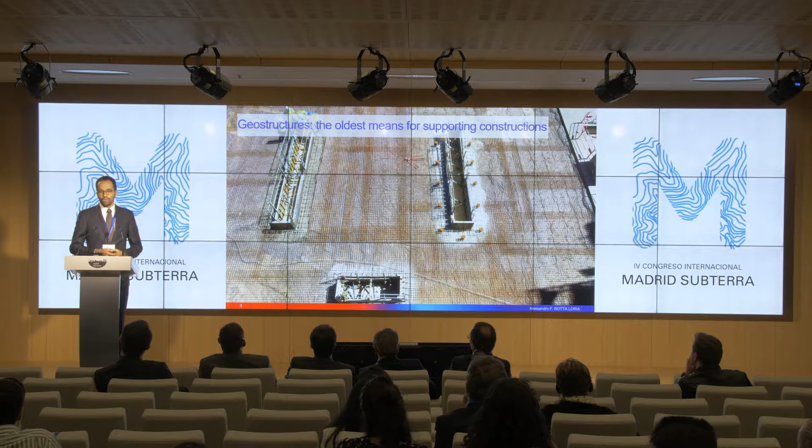Then, as for sure you know, geostructures actually represent probably, again, the oldest means that has been used for sustaining structures. So energy geostructures basically resort to the two previous principles. Actually, energy geostructures leverage the two previous principles by equipping pipes, typically made of polyethylene, within reinforced concrete structures containing a heat-carrier fluid that circulates into them.

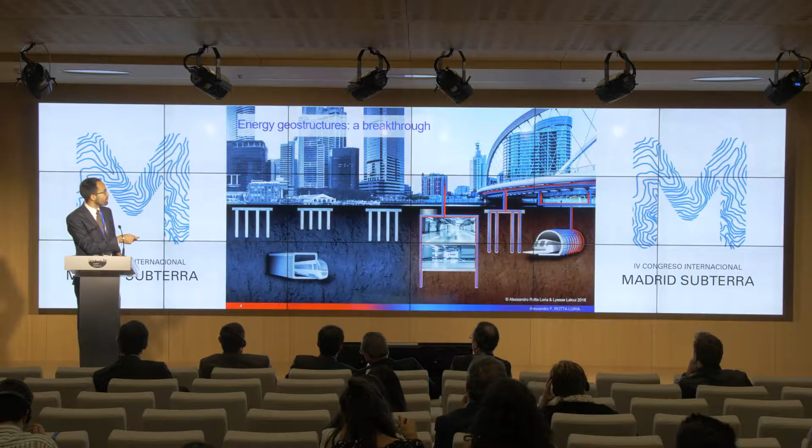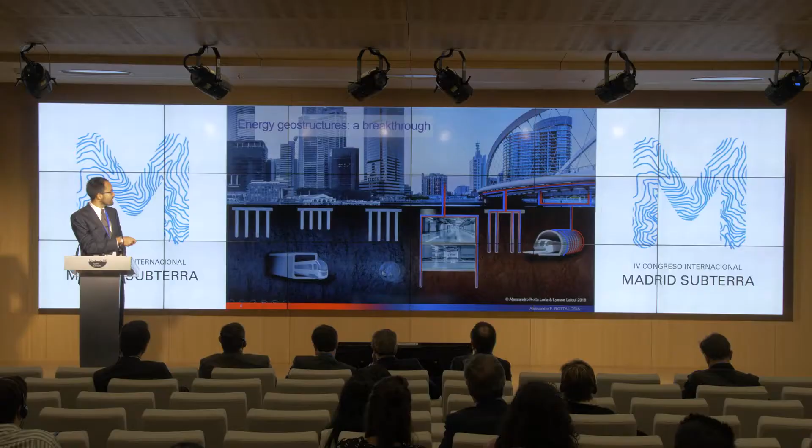And this actually allows to achieve a favorable heat exchange between the ground and all types of built environments, so that conventional structures such as pile foundations, retaining walls, and tunnels can be transformed into so-called energy piles, energy walls, and energy tunnels. So that's the novelty. And again, the concept is relatively simple. It's based on the fact that the temperature at shallow depths remains relatively constant throughout the year. And so what we are actually doing with these energy geostructures is to harvest the energy that is present at shallow depths for applications that include, for example, the heating and cooling of buildings and infrastructures.

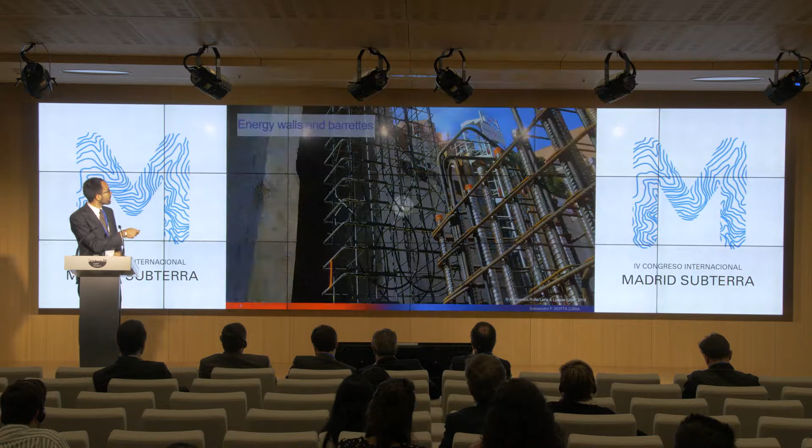So what we get in practice are these kind of structures in which you can see pipes that are mounted along the reinforcing cage of piles to transform them into so-called energy piles. Or you can deal with so-called energy barrettes and walls. And again, there you can appreciate the pipes installed along the reinforcing cage of these structures, in which the heat carrier fluid will circulate, exchanging heat. And this heat carrier fluid typically is water. So again, the principle is simple, and as all simple principles, it works, the technology works pretty well.

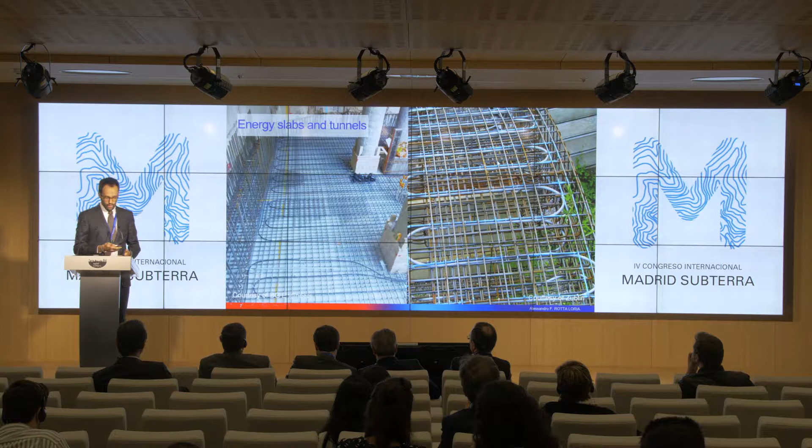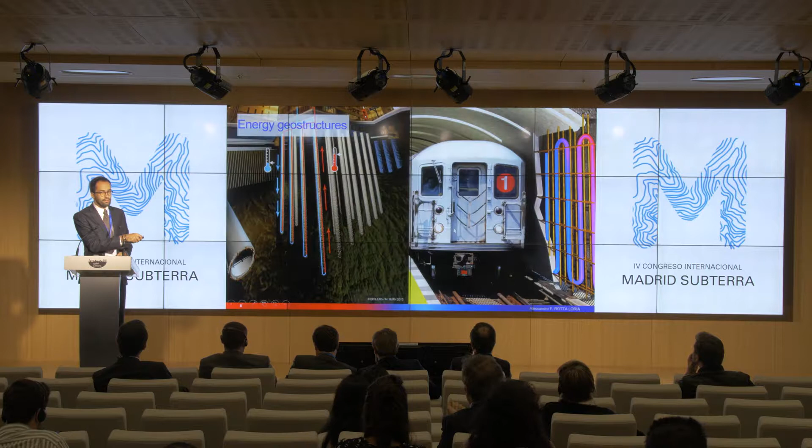And you can also have other types of energy geostructures, such as slabs, as well as tunnel segmental linings, for example. So again, what you can get are those types of structures here. You can have both deep foundations and shallow foundations, as well as energy infrastructures, such as tunnels. But what's the relevance of this?

So, as it has been highlighted, the building sector substantially contributes to the world final energy consumption. Depending on the country, from 25 to 45% of the global final energy consumption is associated with the building sector. And if you zoom in this contribution, again, depending on the country, you can appreciate that from 50 to 80% of the energy we consume in buildings is actually employed for their heating and cooling, thus for space conditioning, as well as for hot water production. So a massive amount of the energy we consume is actually employed for the heating and cooling of our environments, as well as for the production of hot water.

Now, the main issue that we currently face is that the global energy market has been and is still dominated by the use of non-renewable energy sources, and in particular by the combustion of fossil fuels that, as we know, lead to consequences such as environmental pollution and more extreme and unusual climatic events that are triggered by the combustion of fossil fuels and the release in the atmosphere of CO2 emissions and greenhouse gases in general.

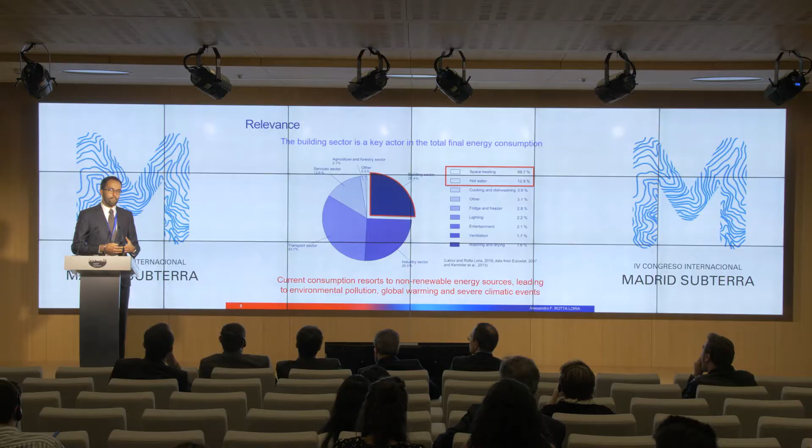So by harvesting shallow geothermal energy, which is a renewable energy source, energy geostructures allow us to avoid this problem and to sustain in an environmentally friendly way human activity needs. In particular, there are plenty of opportunities around the world to develop these systems.

In Europe, thanks to the Energy Performance of Buildings Directive that basically promotes the development of so-called nearly zero energy buildings, these buildings that, among other features, harvest local renewable energy sources. And this is also present in the United States with similar initiatives.

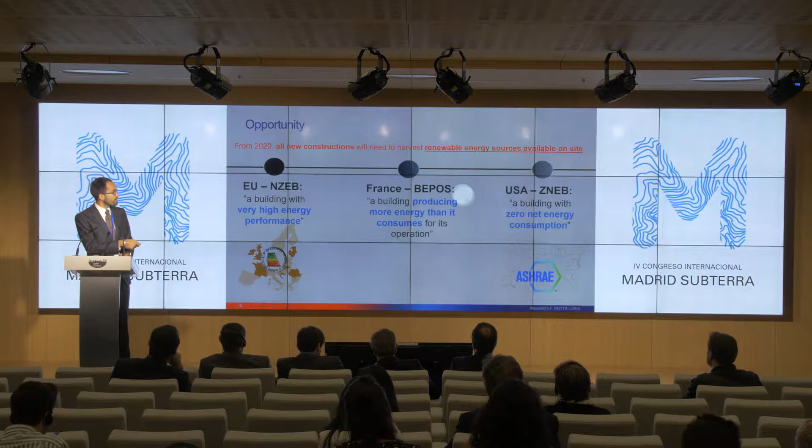Such a concept has been further pushed forward in France through the development of so-called BEPOS buildings, so positive energy buildings that actually produce more energy than what they consume during their operation. So all of this means that basically, almost irrespective of your geographical location, there are incentives to apply these technologies.

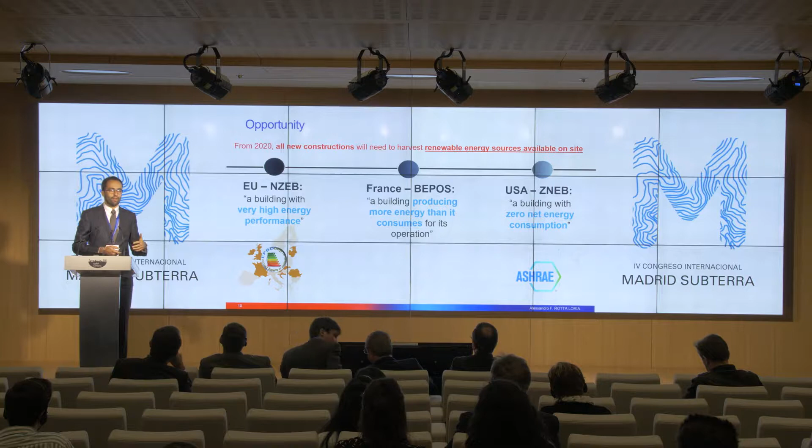De-icing applications are particularly favorable because we can avoid the use of salts to de-ice structures and infrastructures such as road pavements, etc. And this is a critical advantage compared to conventional approaches resorting, for example, to mechanical systems or salts that in the long term will reduce the resilience of these structures.

And the application of energy geostructures for underground thermal energy storage is particularly favorable in several conditions where we can use the ground as a thermal battery. So the idea is that we store thermal energy there that will be used in the foreseeable future for given applications that include, for example, heating and/or cooling.

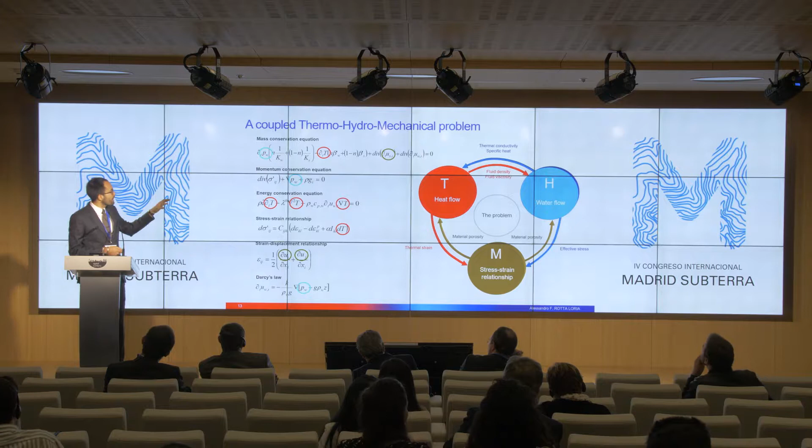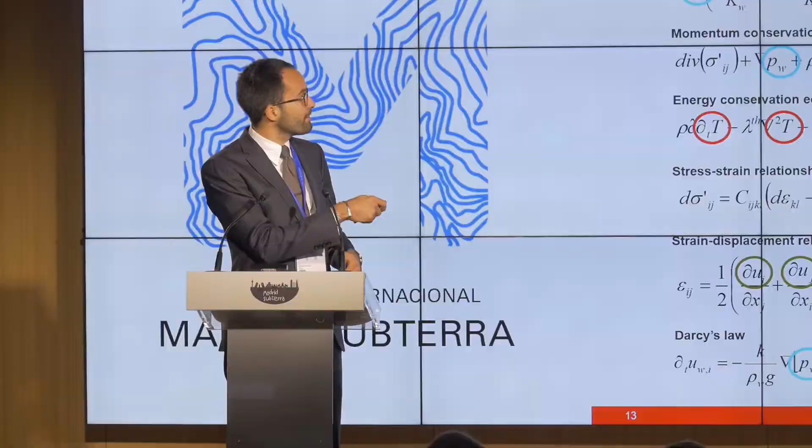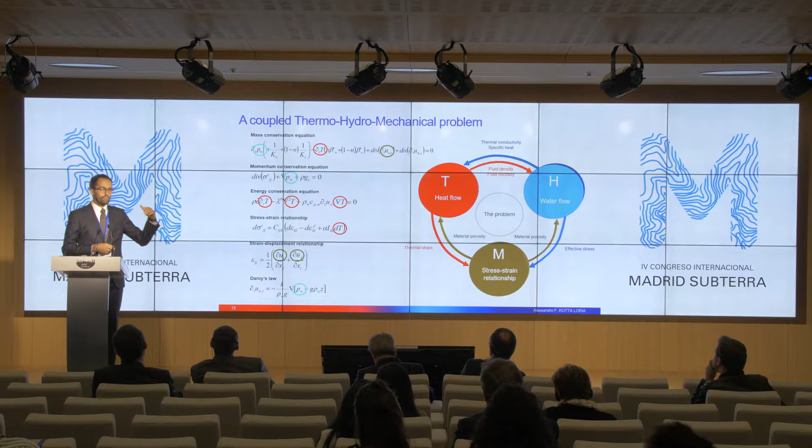In the slide, you can particularly see so-called master equations or governing equations that describe heat transfer, mass transfer, as well as the equilibrium of bodies. And as you can see, several variables appear in different equations, highlighting a coupling between phenomena such as heat transfer, mass transfer, and deformation. That is to say, heat transfer can trigger mass transfer, the opposite is true, but heat transfer and mass transfer can also influence the mechanics of materials. So when we design and analyze energy geostructures, there is the need to consider all of these coupled aspects.

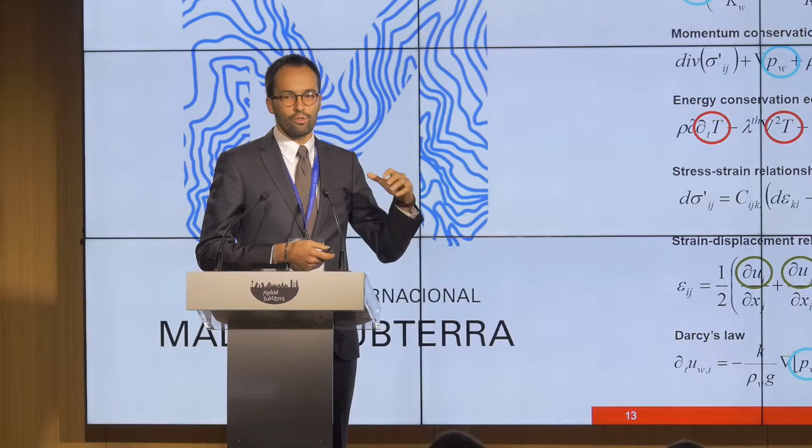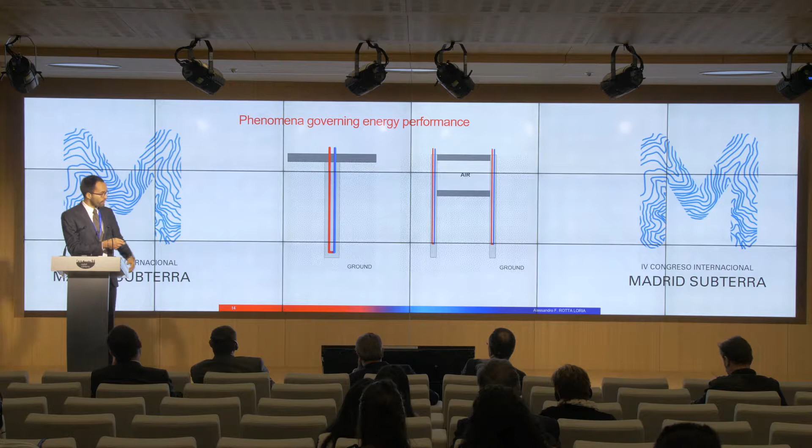In particular, the energy performance of energy geostructures is governed by the thermohydraulic behavior of these structures, which depends on phenomena such as heat transfer and mass transfer. And in this context, of course, we need to deal with different materials, such as the ground, the air in the context, for example, of tunnels, as well as the material that is used to constitute energy geostructures. And here there are a number of phenomena that occur that allow us to have this energy harvesting.

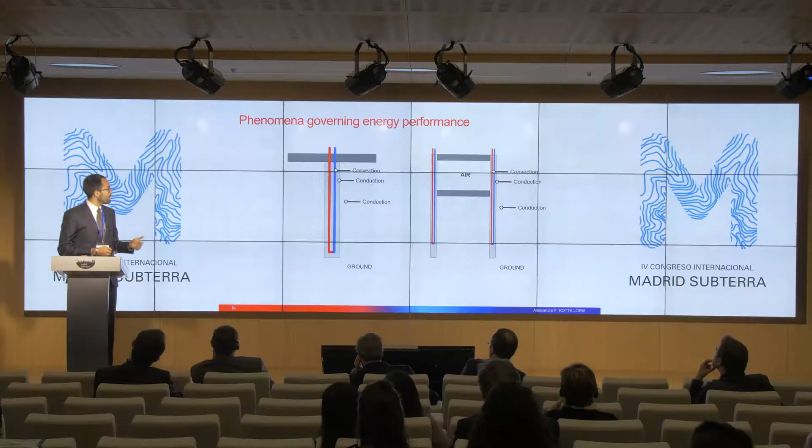Typically, we have convection heat transfer that occurs due to the circulation of the fluid in the pipes. Conduction heat transfer within the material that constitutes energy geostructures, that typically is reinforced concrete. And then conduction or convection in the ground, depending on whether a limited or significant groundwater flow is present.

Now, a key feature of energy geostructures such as energy tunnels is that in addition to being capable of harvesting energy from the ground, with energy tunnels we can also harvest energy through the air that is present in tunnels. So as it was introduced, when trains brake, they release heat. People waiting for the metro release heat as well. There is the influence of the waste heat present at shallow depths due to the buildings and infrastructures present therein. So there are a number of influences that modify the temperature field, not only in the ground but also in the air, and that can be used for the energy harvesting.

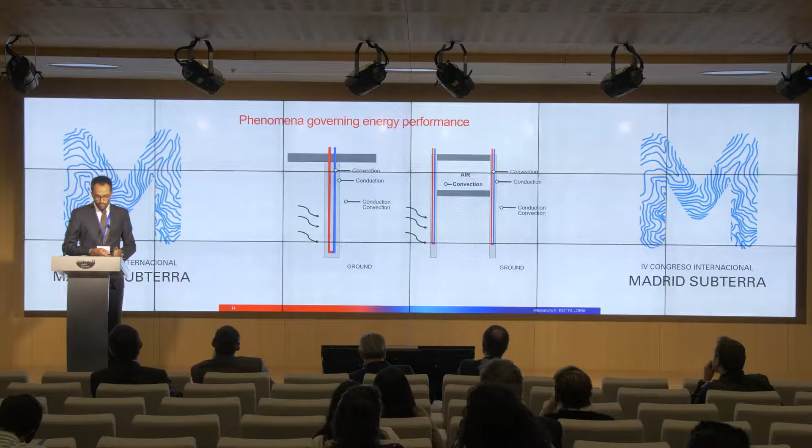And these are some of the aspects that must be considered for the energy analysis and design of energy structures. Now, when we deal with the geotechnical and structural performance of energy geostructures, because as you can infer, we must analyze and design them to be able to sustain the loads coming from buildings. First, we need to deal with the mechanical loads, and this is something that is conventional, and we need to deal with, for example, mechanically induced compressions of our structures.

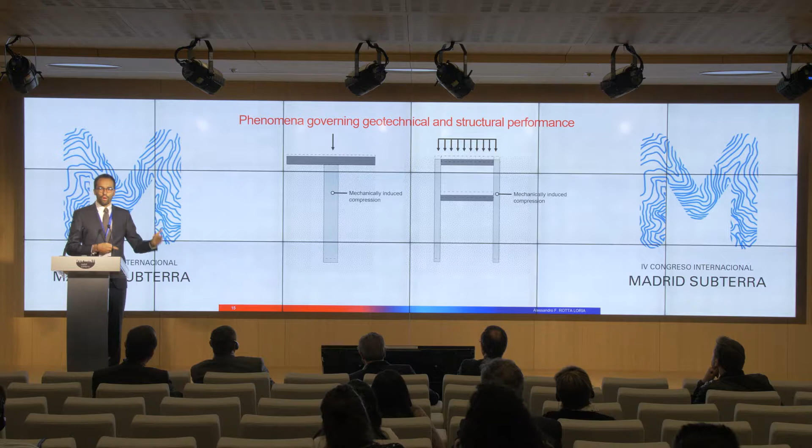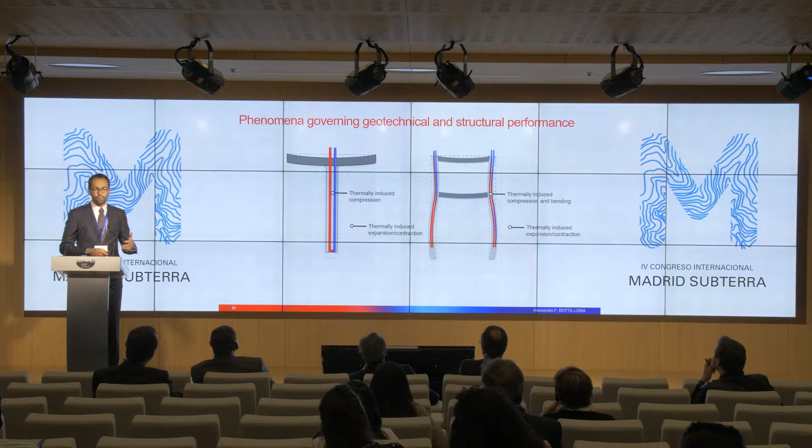While when we deal with the energy harvesting, we expect to have temperature changes that will modify the behavior of these structures and must be considered again for the analysis and design of these structures. In particular, the energy harvesting of energy structures will lead to thermal expansions and contractions of both the structures as well as the surrounding ground.

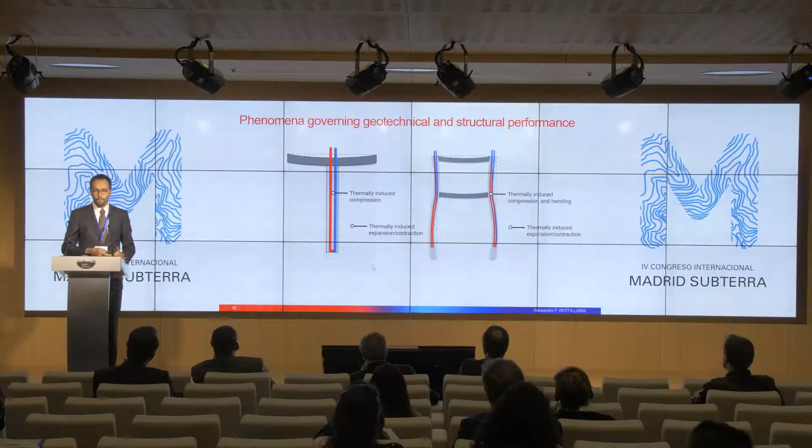Okay? Now, the key implication of all of this is that we are dealing with a multi-physical and coupled behavior. And because of this, we need to develop fundamental theoretical and experimental competence as well as prediction tools to be able to analyze and design energy geostructures. So this has actually been the goal of Professor Laloui and myself over the past several years. So to develop competence that will allow to massively establish and develop energy geostructures around the world.

So today, among the various possible topics that I could treat, I have decided to focus on the analysis and design of so-called energy piles, as well as on the analysis and design of so-called energy barrettes. And I will do so by considering a case study that we worked on at Geoeg, our consulting company, in a recent period. That is this project here located in the Principality of Monaco.

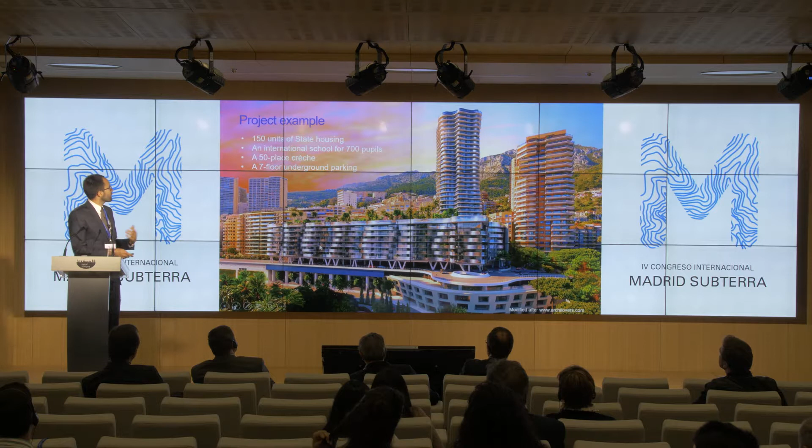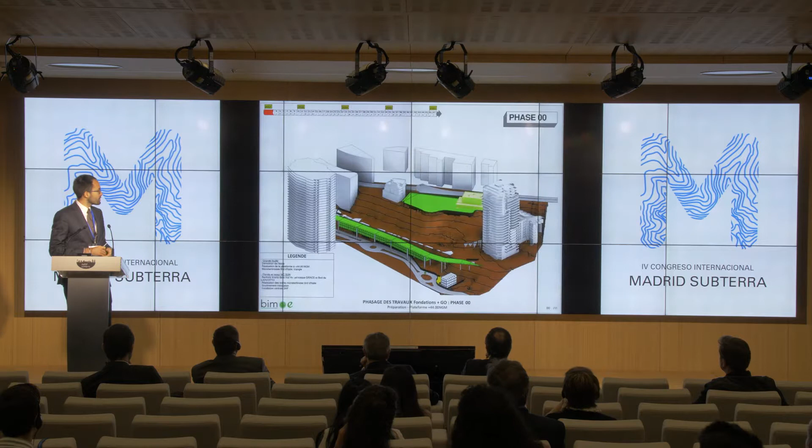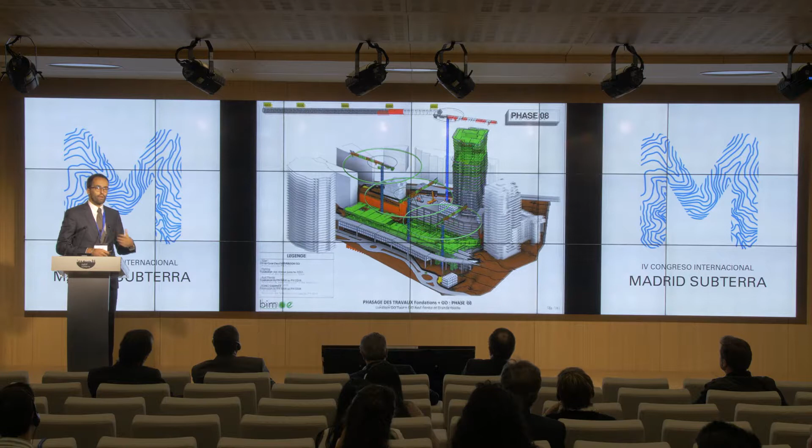The project actually includes this tower, and even though it's not pictured there, there will be an additional tower, as well as this building down here, including 150 units of state housing, an international school, a creche, and a multi-floor underground parking. Here you have some features of the project. So actually, the project is located in a very dense urban environment. The construction of this building is extremely complex. It gathers several construction phases, several types of structures. This was the construction state last summer in May 2019.

And actually here you can see, for example, the installation of an energy barrette in the ground. This is actually a 70-meter deep energy barrette. So it's almost like a high-rise building itself, the barrette that sustains the building, in which you can see the pipes mounted along the reinforcing cage that, as I told you before, will contain basically water that will circulate into them, allowing to exchange heat with the ground.

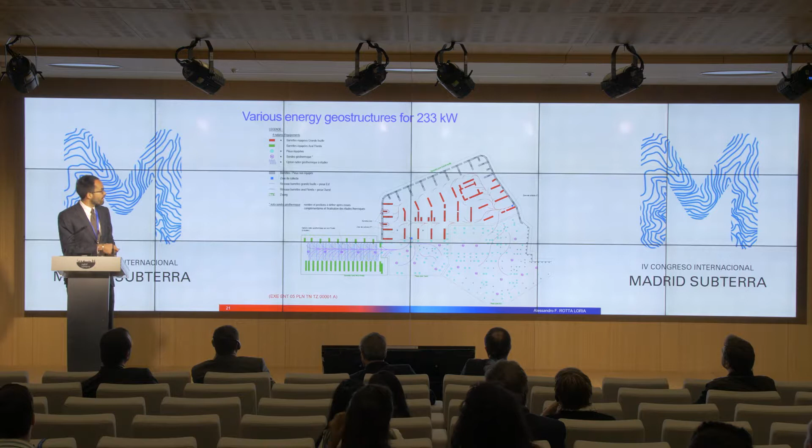And so, as you can expect, even though today I will only focus on the analysis and design aspects involved with energy geostructures, there also are very important challenges related to the realization of these structures that must be considered properly for a successful application. Okay. Now, in the context of this project, a design of a complete energy foundation has been developed. In particular, the foundation gathers energy barrettes, energy piles, and energy walls. And in the following, I will expand on some features of these foundations.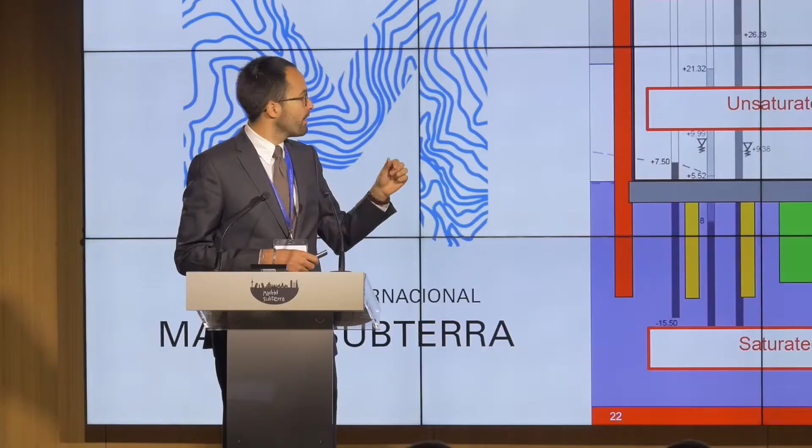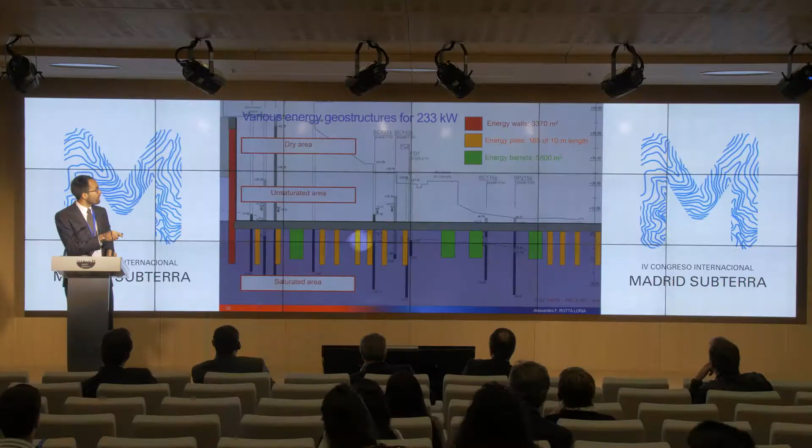This is a schematic of the stratigraphy of the site, in which you can see that there is an unsaturated area and a saturated area, where the main challenge there is actually to ensure an optimal performance due to the fact that when dealing with unsaturated ground conditions, the energy performance will be a little bit lower than under saturated conditions, and this is related to the physical properties of water, for example, that is present in the pores of the soil. So we dealt with massive square meters and numbers of energy piles to supply renewable energy to the considered building.

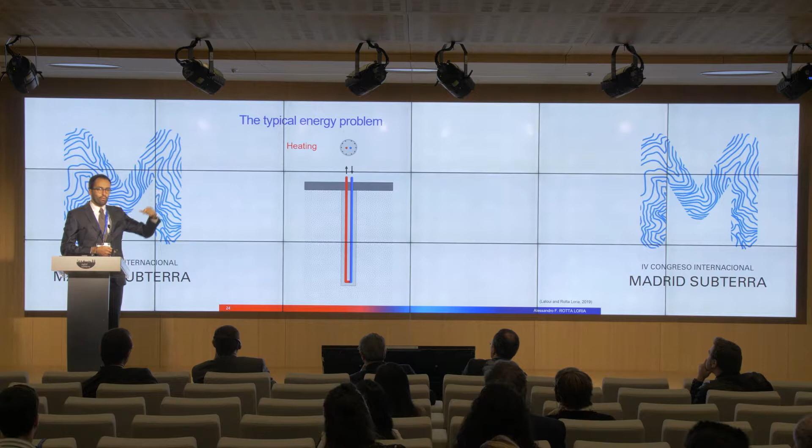So when we focus on the analysis and design of energy piles, as I told you before, there are a number of challenges that need to be considered. The typical energy problem actually involves the circulation of a fluid into the pipes. So that's the critical difference compared to conventional piles. Okay, so we have pipes with a heat carrier fluid that circulates. When we target the heating of buildings, we inject a fluid that is colder than the temperature in the ground, and it will actually come out of the ground warmer for the heating of the building. And the opposite will occur when we cool buildings.

So we will typically inject a fluid that is warmer than the temperature of the ground in order to cool it down and use this temperature for the cooling of buildings.

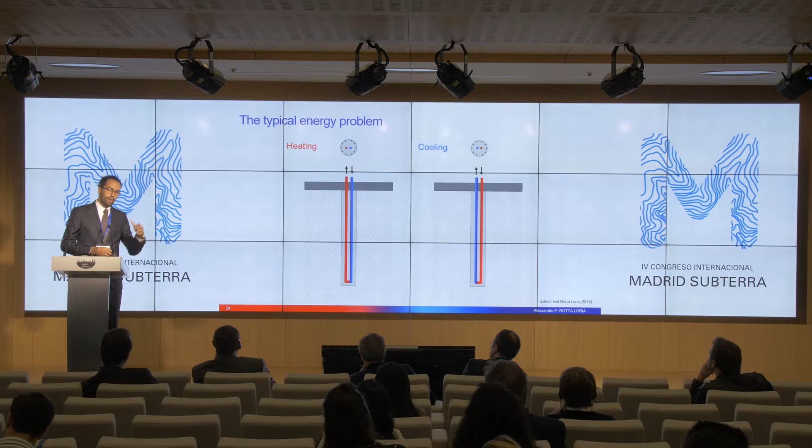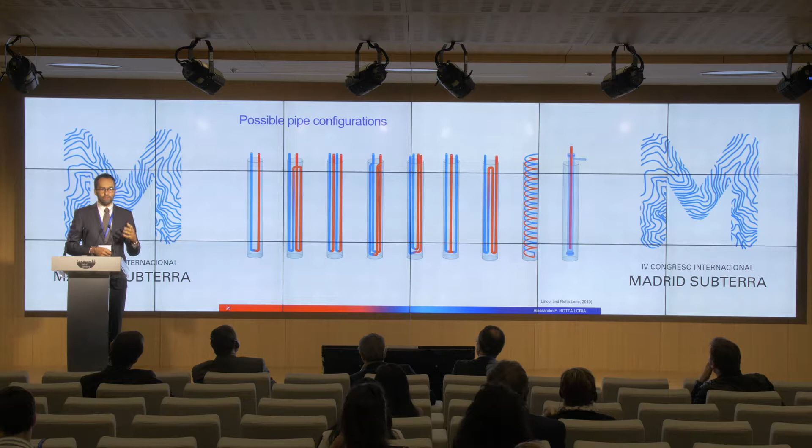Okay? Now, as soon as we deal with pipe configurations, there is the challenge in this context to define what are the best pipe configurations. And this is a key aspect. Although it might seem a relatively simple engineering aspect, it actually strongly governs the energy performance of energy piles, as well as other energy structures. In particular, I will try to prove to you the following through the results of numerical simulations that we carried out for this purpose, and that we typically carry out in the context of our projects.

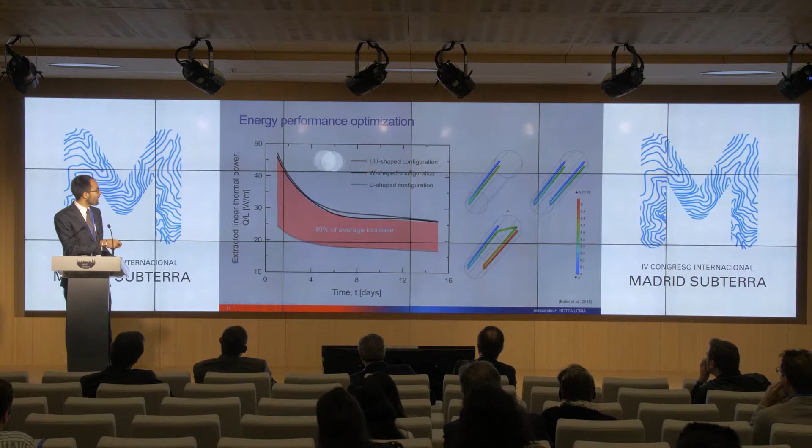In this slide, you can appreciate over time the evolution of the thermal power that can be harvested through an energy pile in some given conditions. As you can see, only depending on the pipe configuration, so for the same site condition, a different pipe configuration can give you a variation of up to 40% of the energy yield that comes from the same pile in the same conditions under the same exploitation. So that's a major aspect.

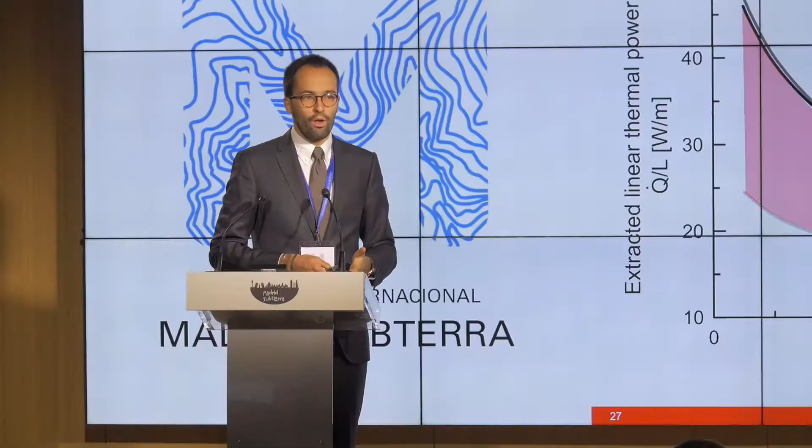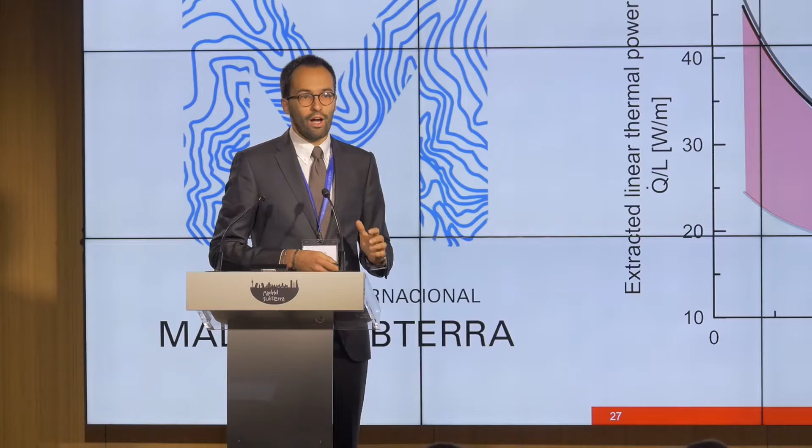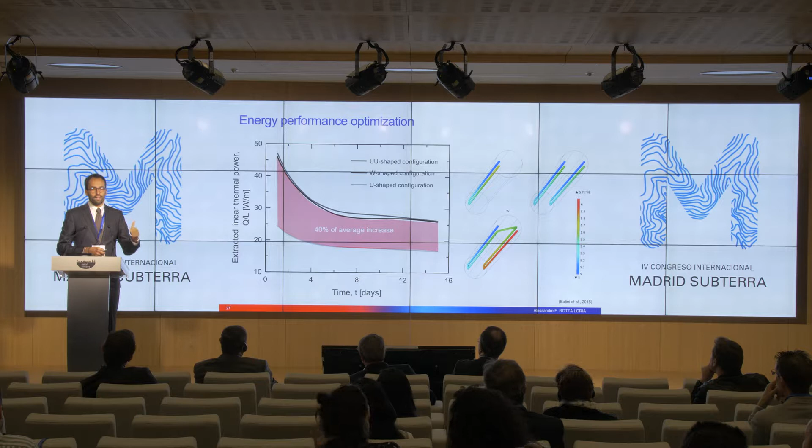If you can imagine that the system of energy structures that you design might give you 40% more of the energy that you could expect, this is for sure something that must be considered properly in analysis and design. Often, what we see is that people don't think that energy structures are easy to apply, or they don't provide sufficient energy. Well, based on our experience, there are very few cases, if any, in which energy structures are not applicable and are not effective. If designs of this technology do not give an appropriate energy yield, probably it's because the design itself was not carefully executed.

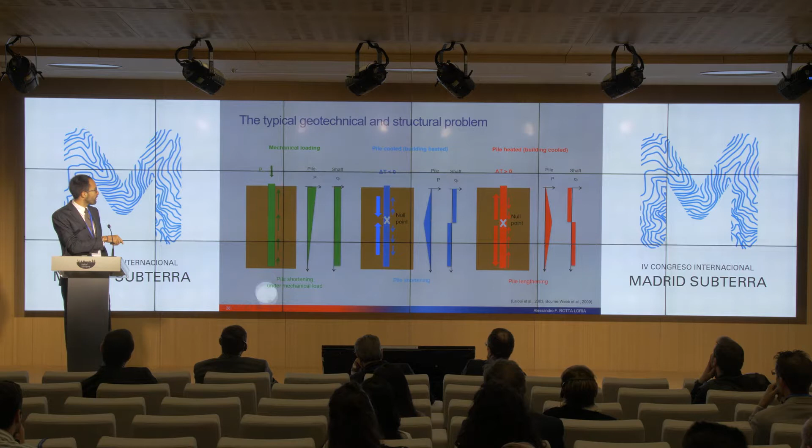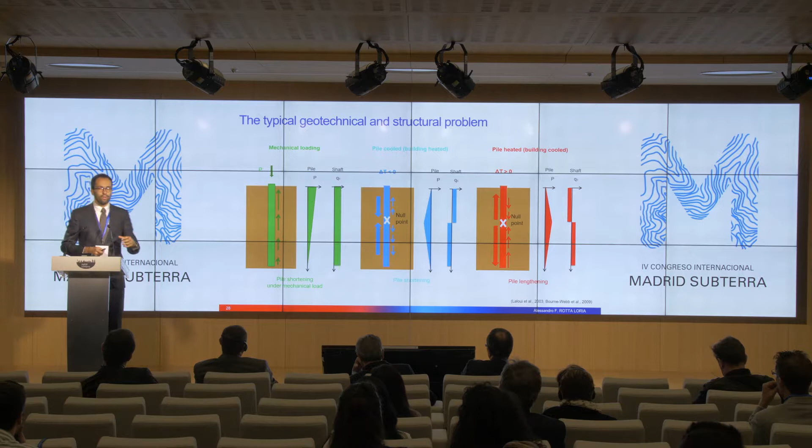Okay. Now, when we deal with the typical geotechnical and structural problem involved with energy piles, this is what happens. Compared to the evolution of forces along the depth of piles, the same evolution caused by thermal loads associated with building heating or cooling is profoundly different and must be considered for analysis and design. In particular, due to the fact that the piles will be restrained by the presence of the ground, thermally induced stresses and strains will be developed, and these must be considered for the geotechnical and structural analysis and design of these geostructures.

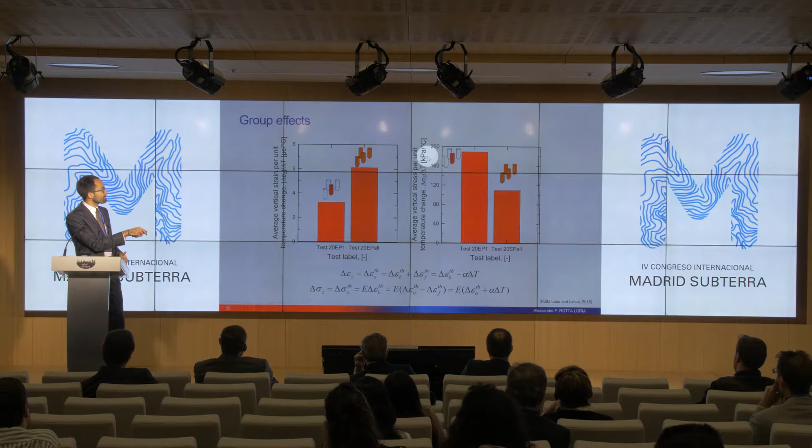A further aspect that comes into play is that when energy piles and piles in general are located sufficiently close to each other, they interact with each other. And in the context of energy piles, we have group effects caused by both mechanical and thermal loads. These group effects induce a higher group deformation under the same average load, as you can see in this slide, which shows, for a group of 4 piles in which only one or all of the 4 energy piles are activated, the increase in vertical strain per unit temperature change. And at the same time, you have a decrease in the stress that develops in the piles due to the presence and influence of group effects.

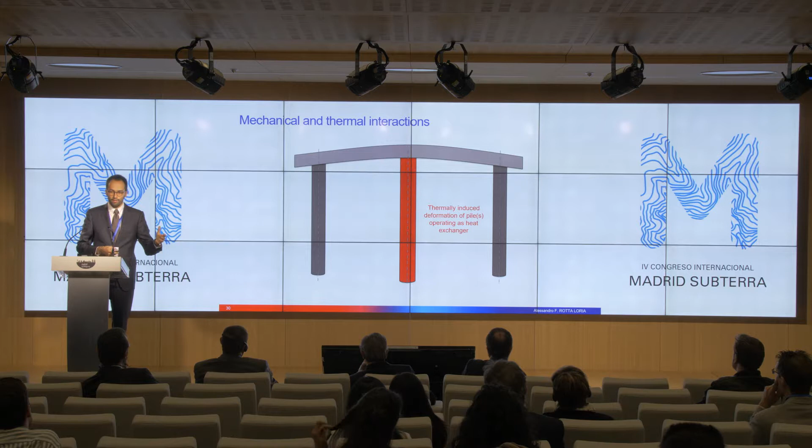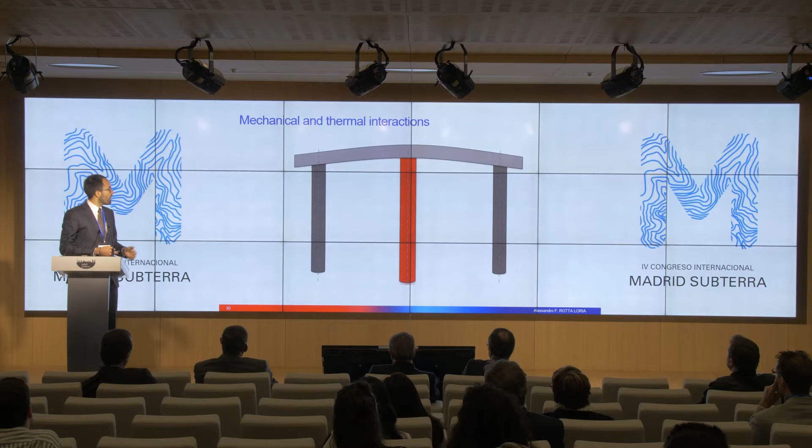Now, what we typically deal with when we deal with energy piles is something like this. We have foundations that expand, that affect the slab that typically connects the piles. These will induce mechanical interactions with piles that might not operate as heat exchangers located in the surroundings. Then we typically have a heat diffusion that might affect piles located nearby that will also expand on their own. So all of these aspects must be considered for the geotechnical and structural design of energy piles.

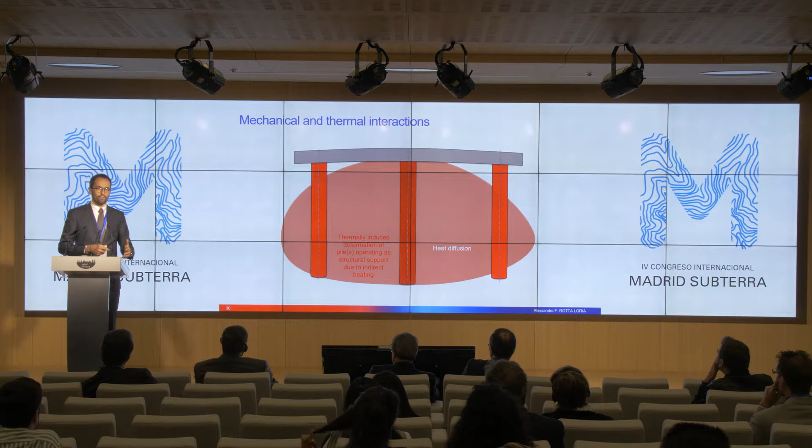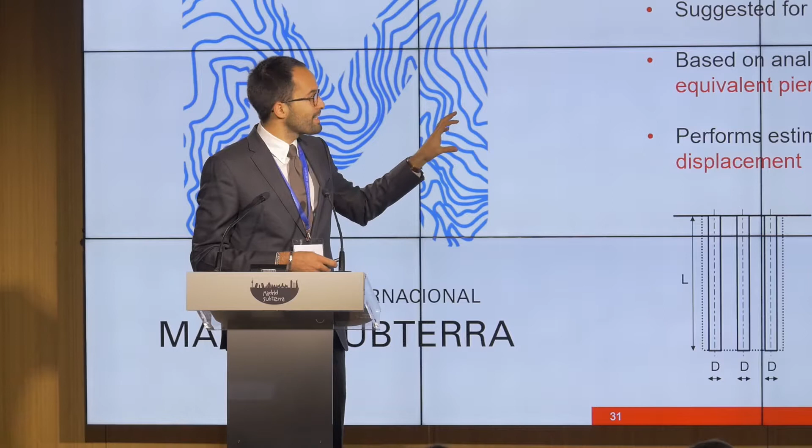To address these problems, there are, of course, a number of ways. What we developed in this context, and what I will talk about in the following, are analytical models that can be used for this purpose. In particular, we developed two theoretically sound analytical models that simplify energy pile related problems to a single equivalent pier or a pair of piles, and allow us to get the overall deformation of energy pile groups in an effective way.

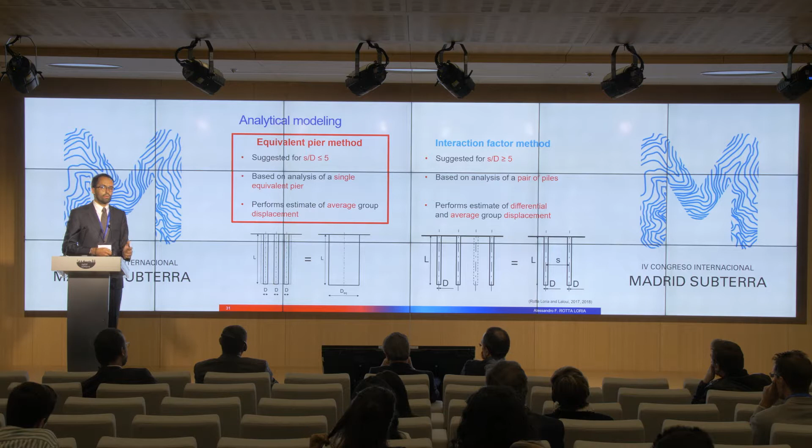And so in the following, I will just briefly focus on some features of the so-called equivalent pier method. The rationale of this method is that any general energy pile group can be modeled as a single equivalent pier, characterized by the same average length of the piles in the group, as well as by an equivalent diameter and some equivalent thermomechanical properties.

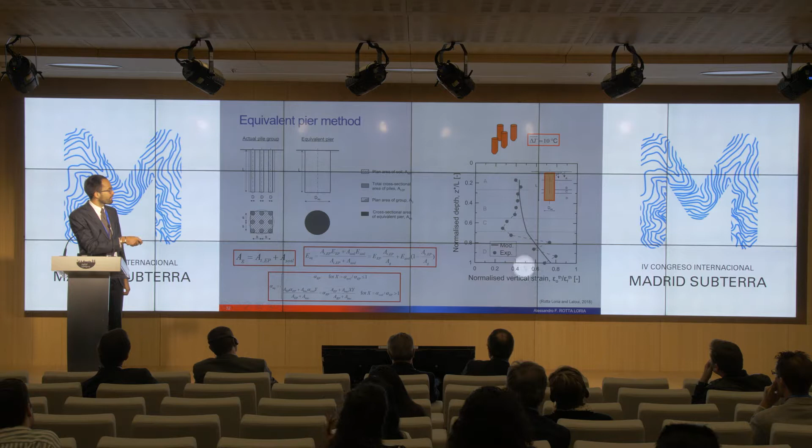And what this model actually allows us to do is to get the vertical deformation of any group of piles that might be subjected to mechanical and thermal loads. For example, here you have a prediction of the vertical strain that was observed in a group of 4 energy piles with depth when these piles were subjected to a temperature change of 10 degrees Celsius.

Okay, so that's typically a simplified yet rigorous theoretical approach that can be applied in practice to analyze and design energy pile foundations. And this closes some of the aspects that must be considered for the analysis and design of energy piles. So from one side you have the energy aspects, and from the other side, although everything is integrated, you have the geotechnical and structural aspects.

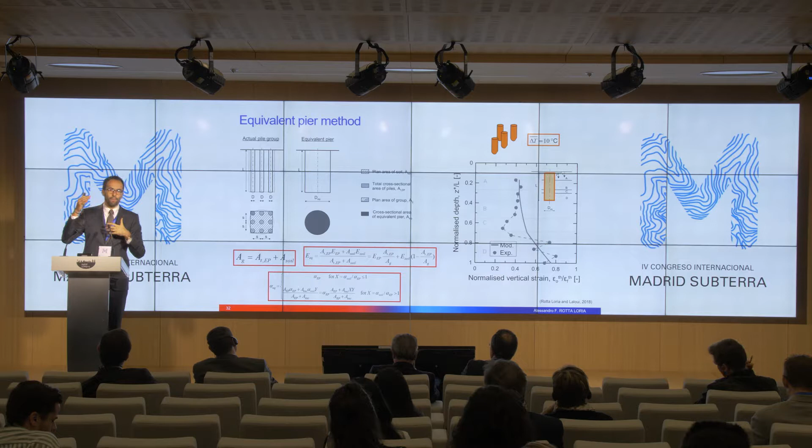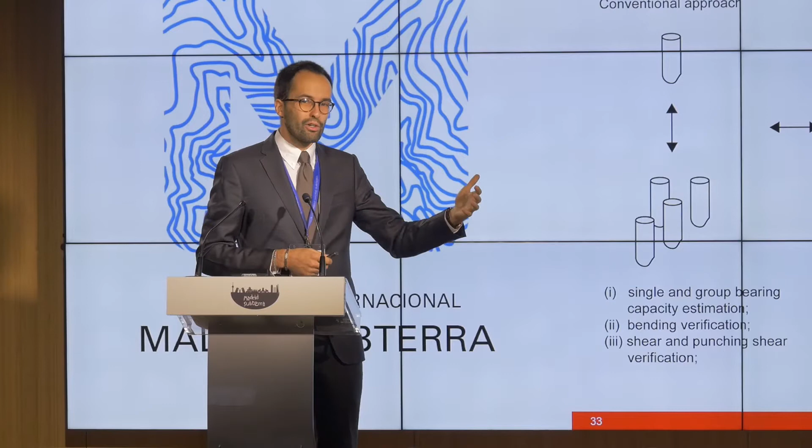Now, before I told you that basically the influence of thermal loads should be considered in design, so in recent years, the main question was when and how. So when and how should we consider the influence of thermal loads? Should we consider them from a structural and geotechnical design perspective at ultimate limit states, so when dealing with failure-related conditions, or only at serviceability limit states, that is, when dealing with deformation-related conditions?

And so what we did in that context was actually to prove, based on theoretical considerations, that the influence of thermal loads should be considered only at serviceability limit states, because these loads only affect the deformation of energy geostructures and energy piles in particular.

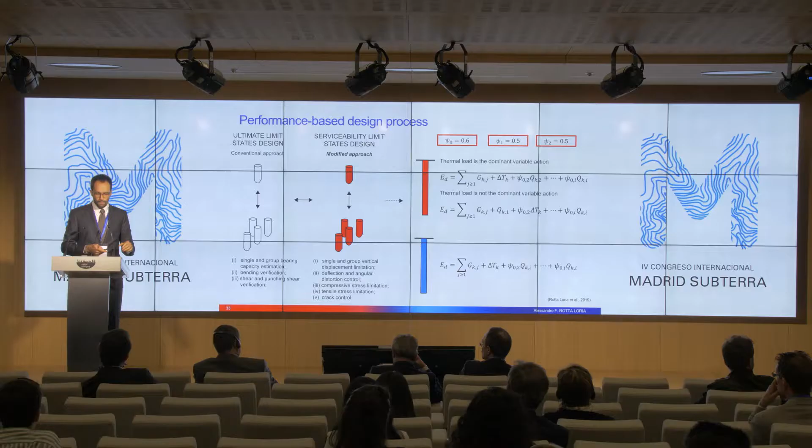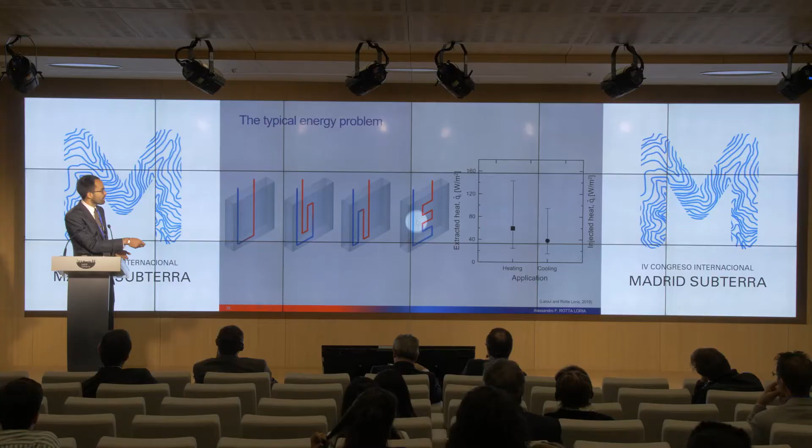So I would now like to step into the analysis and design of energy barrettes, which are actually, as you have seen, pile foundations that are used to sustain typically tall buildings, very tall and heavy buildings, in situations in which the use of piles is not sufficient. Again, here the first aspect that needs to be considered is the pipe configuration. As you can see, depending on the pipe configuration, you can have a tremendous change in the thermal power that can be harvested through these energy geostructures in the same site conditions.

Differently to energy piles, as I showed you before, when dealing with plane energy geostructures such as barrettes, we can have these structures completely embedded in the ground. So the heat exchange primarily occurs between the ground and the energy geostructure. But you can also have interfaces with air. And in that context, you also have convection heat transfer that develops and is typically proportional to the velocity of the air that flows adjacent to the structure.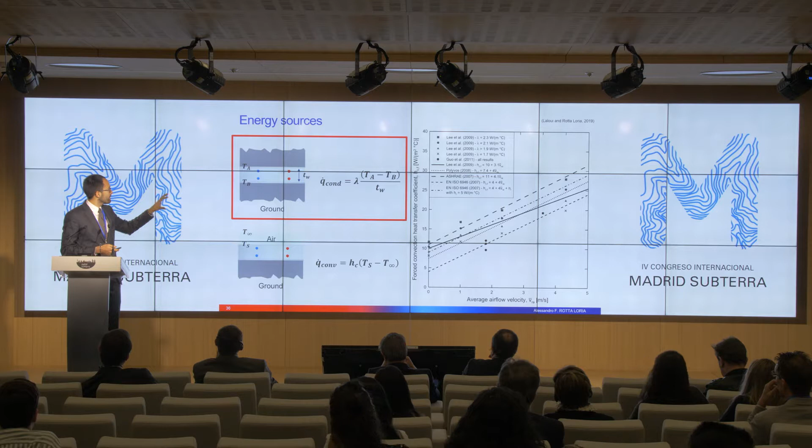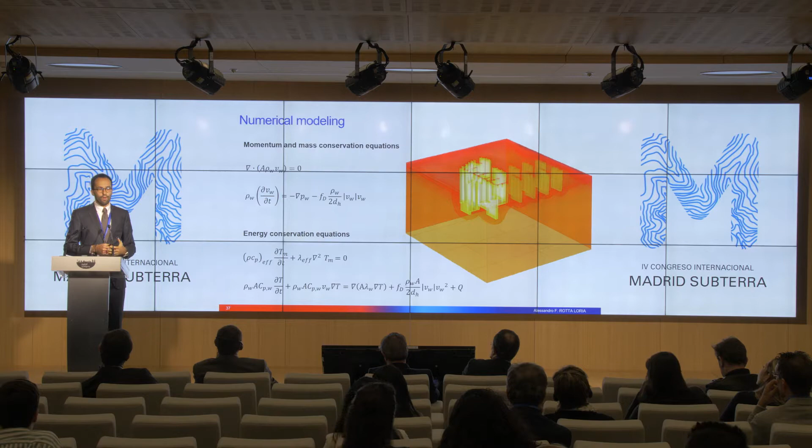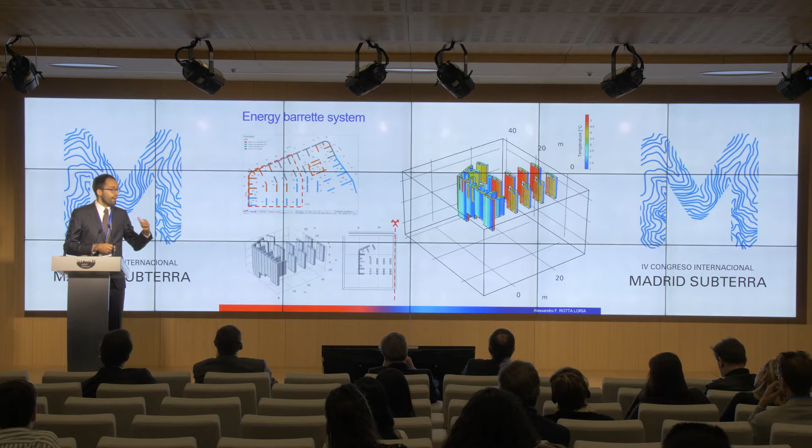So in the following, I will just focus on the first case for conciseness' sake, in which heat transfer is governed by conduction and is developed when energy barrettes are completely surrounded by the ground. To do so, again, I will use the results of numerical simulations that we carried out with reference to the considered case study. These simulations include the modeling of the heat and mass transfer that occur within the pipes, but also within the barrettes, and in the surroundings of the barrettes.

And to get complementary information, I will also expand on the results of some experimental tests called thermal response tests that can be used to basically quantify the thermal potential of a given site and the energy output that we can expect from any possible type of energy geostructure.

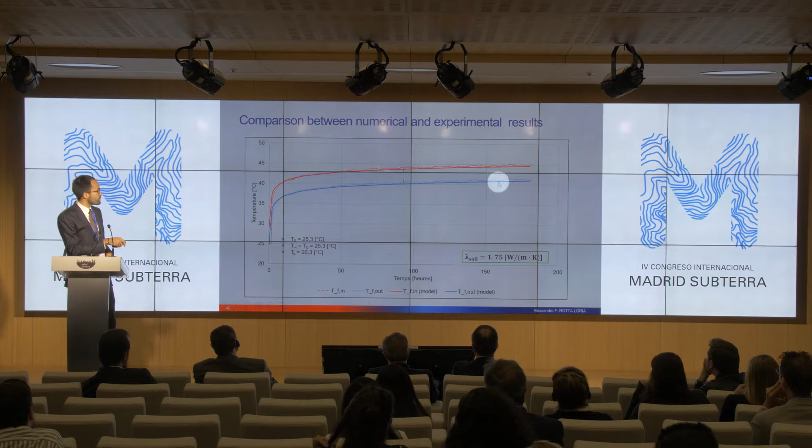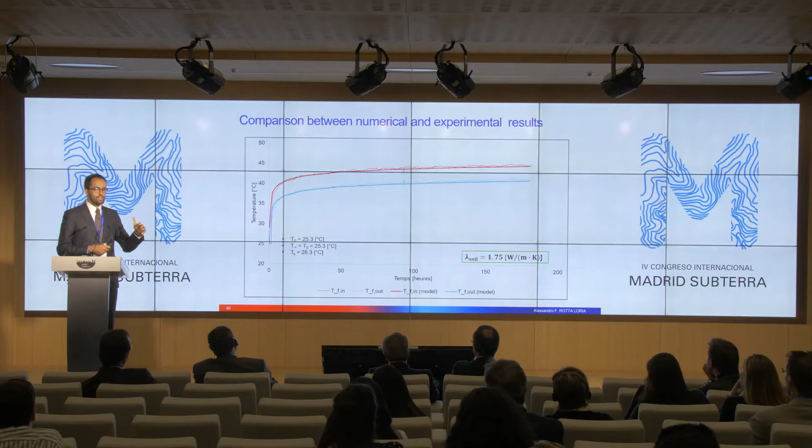And in this slide, you have a comparison between typical numerical and experimental results that can be obtained through these approaches. In particular, you can see over time the evolution of the inlet and outlet temperature from the energy barrette. Such information is critical to understand the thermal power that we can harvest through energy structures, as well as for a more comprehensive understanding of the ground conditions and the ground properties.

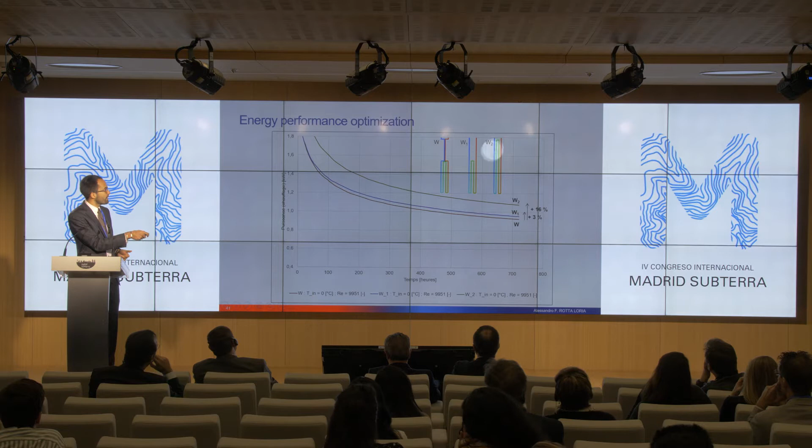So in this context, in order to give you a sense of the influence of the pipe configuration with respect to the case study, we carried out numerical simulations through a model that was validated through the experimental tests. And you can see that only by varying the pipe configuration in this way, we can have approximately 16, so up to 20% of change in the energy that can be harvested from the same barrettes. And from an energy perspective, if you multiply this result by 60 barrettes, as in our case, the result is substantial in terms of energy that you can save.

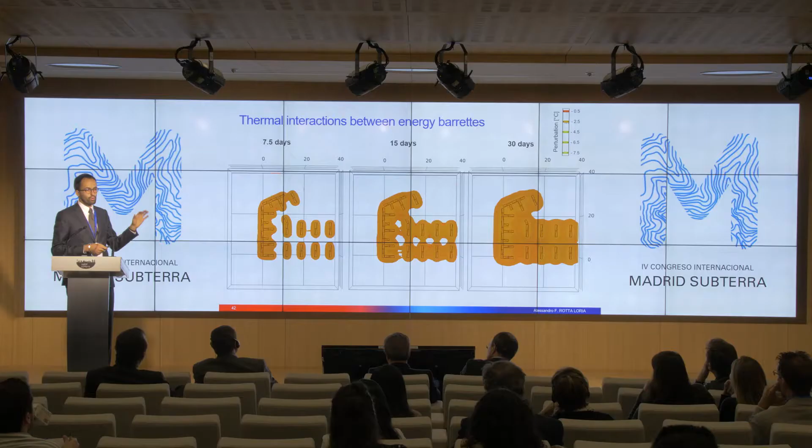Similar to piles, when we deal with barrettes, if they are located sufficiently close to each other, we can expect them to interact. And these interactions can be both mechanical and thermal. So this is a typical result of numerical simulations that could be used to address this problem, in which you see that as a function of time, you actually have thermal interactions that develop and will have an influence on the energy performance of your system. And so for this reason, they should be considered in analysis and design, okay?

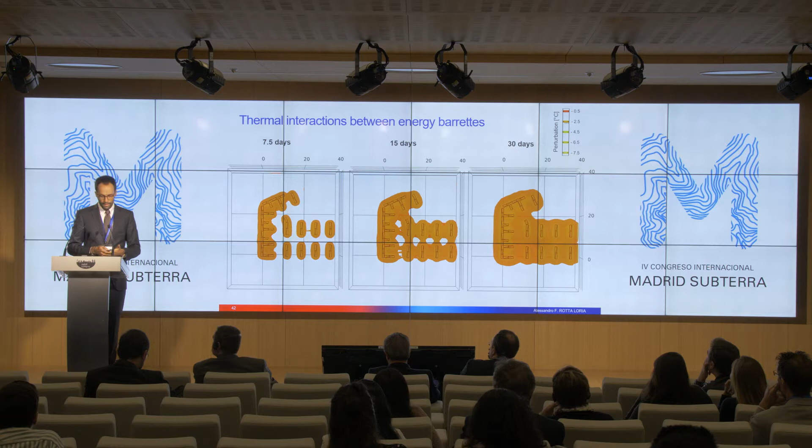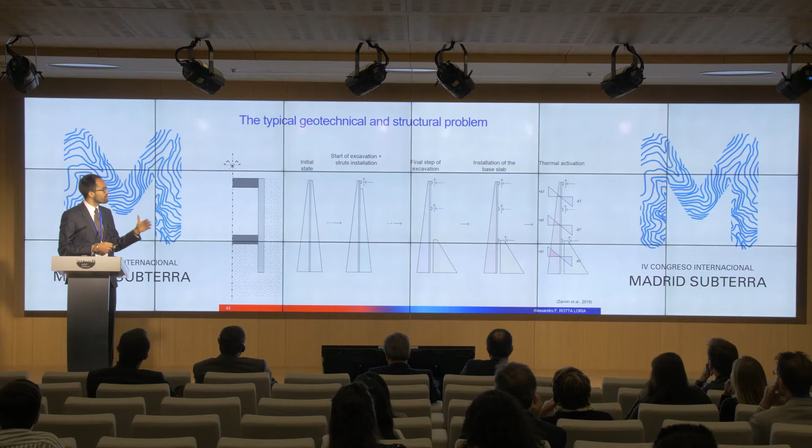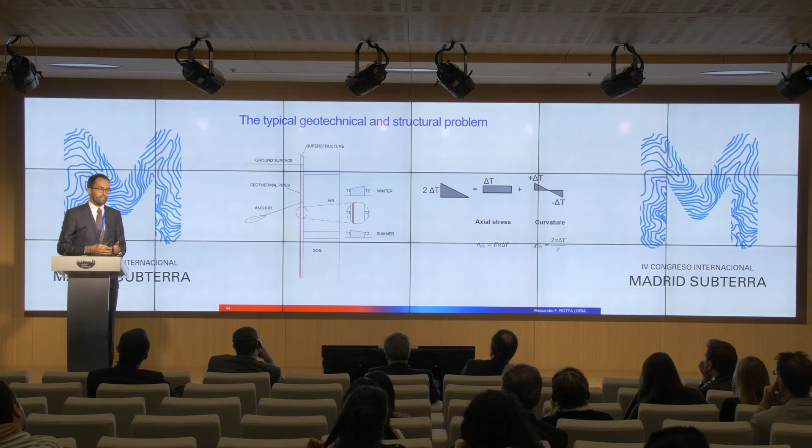Other aspects related to energy barrettes and plane energy structures is that they are subjected, similar to piles, to mechanical loads, and often to flexural loads that induce moments, okay? So in contrast to conventional structures that are only subjected to mechanical loads, in this case we also have the application of thermal loads that cause thermally induced bending moments and curvatures and stress variations, and must be considered again in analysis and design.

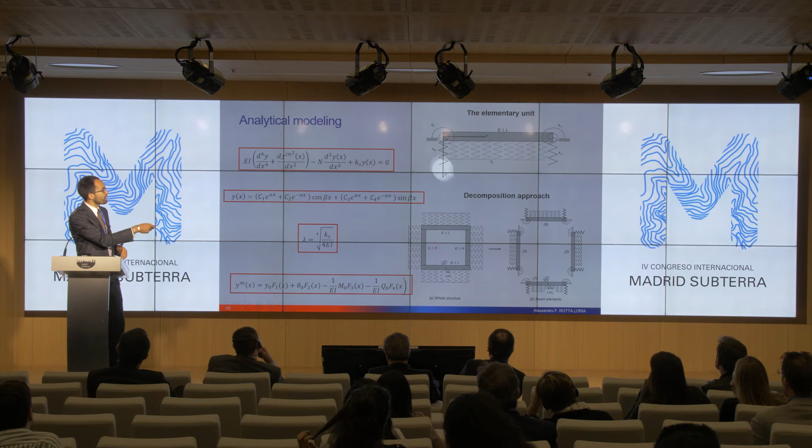So similar to what I have proposed you for the case of piles, in the following I will very briefly expand on an analytical solution that we developed to basically investigate what is the influence of mechanical and thermal loads applied to plane energy structures, where the concept in this case is actually to simplify, to decompose any relatively complex system of plane energy structures into a simpler system represented by a beam resting on an elastic soil, in order then to get, for example, evolutions of the shear forces or bending moments or all the other internal actions that can characterize your structures, and that should be considered in analysis and design, okay?

So until now, we have pretty much focused on the application of energy structures at the local scale of buildings. However, even if I will only briefly touch on these aspects, you can consider to apply energy structures at the district and city scale. So the beauty of the technology is actually that it can be connected into networks to function as energy supply providers, okay? So basically we can assume to work with tunnels, for example, that will provide energy not only for their heating or cooling, which are usually very limited because we don't typically need a substantial amount of energy in tunnels, but we need this energy for the buildings that are located at the surface, okay?

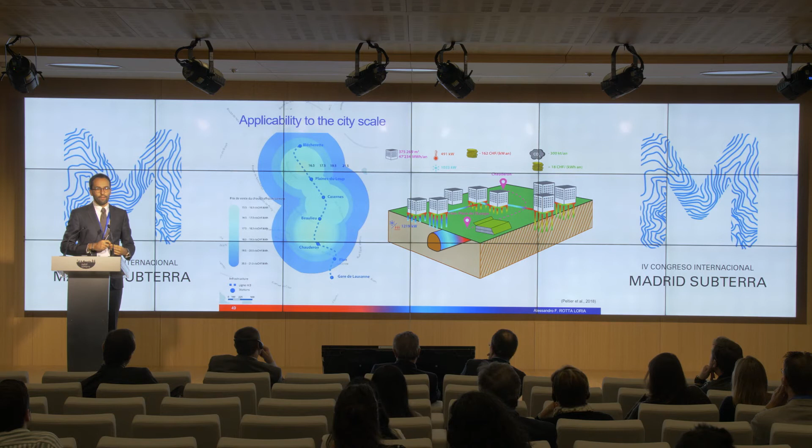So you can imagine to get this energy from there and bring it to buildings and have systems that connect multiple energy structures. So in this context, we are carrying out different studies with a focus on tunnels, trying to see what is the feasibility of this energy harvesting at the district scale. What are, for example, the radiuses of influence around tunnels within which the energy supply is favorable from an economic perspective, in addition to, of course, a physical perspective, okay?

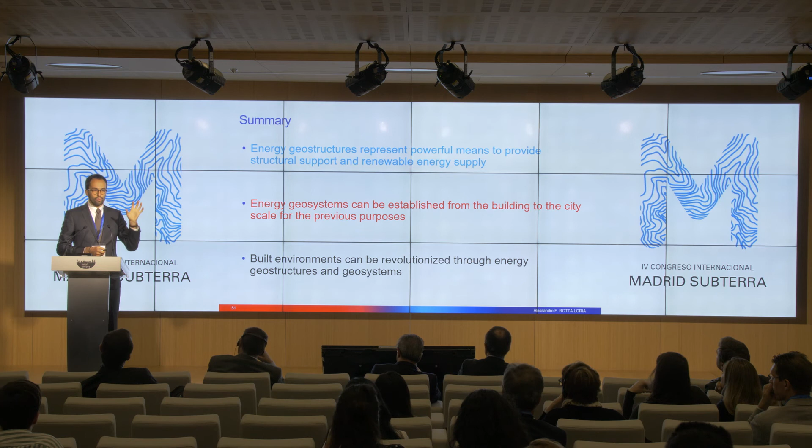So, to conclude, what I have tried to convey to you is that energy structures really represent, in our opinion, a powerful technology to sustain human activity needs with a limited impact on the environment. You have seen that there are broad possible applications: heating, cooling, hot water production in several applications, de-icing, and thermal energy storage. Not only these geostructures can be applied at the building scale, but also at the district scale in the form of so-called energy geosystems.

And so I think this technology will really contribute to make the ground and the subsurface a new, actually probably it is the oldest means, but a new spatial and resourceful means to contribute and to sustain our needs, just thanks to something that is below our feet. Okay, so more and more attention, as it was highlighted in the introduction, will be paid and should be paid to what is present below our feet. And this is one of the technologies that can be used to harvest energy from the ground.